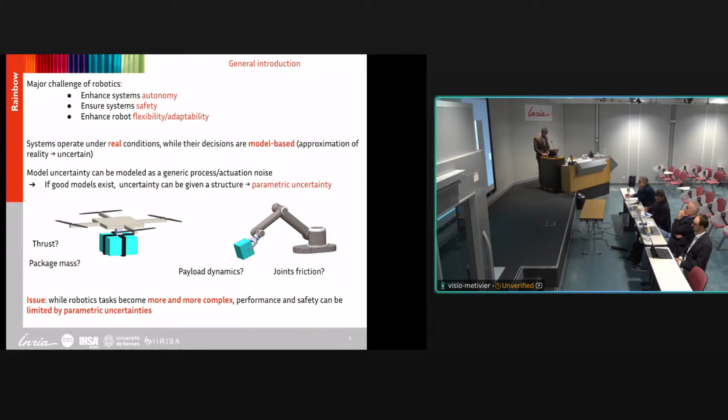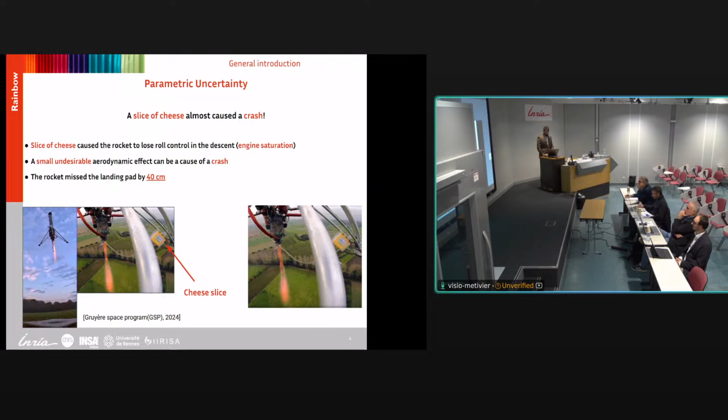A cool example about parametric uncertainty: did you know that a slice of cheese almost caused a crash? This happened with the GSP company in Switzerland in 2024, just recently. They attached a slice of cheese to the base of the rocket during descent, and this rocket lost roll control, which caused engine saturation. So a small undesirable aerodynamic effect can cause a crash — the rocket ended up missing its landing pad by about 40 centimeters. In robotics and aerospace, even minor factors can have amplified effects due to the system dynamics.

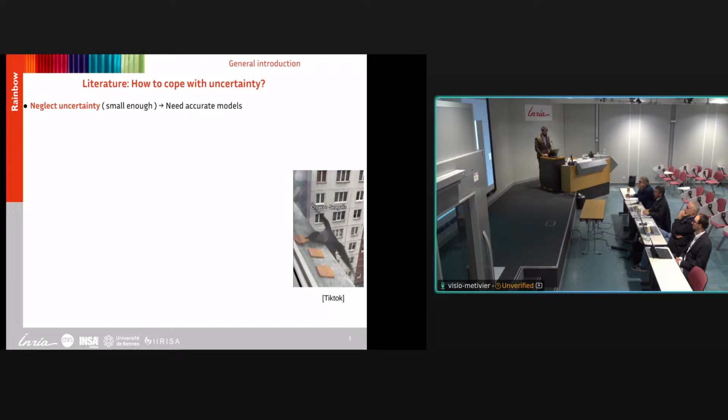So in the literature, how do we cope with uncertainty? You usually neglect uncertainty, considering it small enough, but this would necessitate having accurate models. You could add integral terms or adaptation rules, but this would slow the system responses and degrade the transient state. Or you use robust controllers to reject disturbance or noise, but this is a trade-off for performance, because robust controllers are usually designed for worst-case scenarios, which is not the best choice if your system is operating at nominal parameters.

So our solution is robust control-aware motion planning. It's about picking your favorite controller and then optimizing the reference trajectory such that the task execution is most insensitive to these parametric uncertainties. This is a generalized method for any choice of system controller.

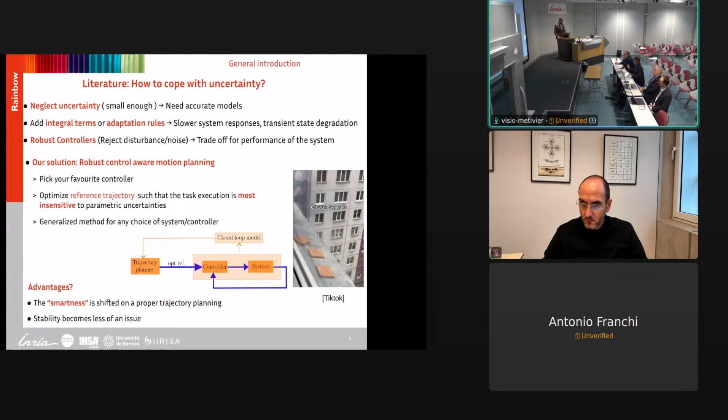The advantage you get is that the smartness is actually shifted onto proper trajectory planning rather than designing sophisticated control laws, and stability becomes less of an issue because you're able to choose the controller that you're comfortable with or that's statistically proven for your system.

Take an example: these two birds both have the same structure, they both can fly very well, but one had a robust methodology in reaching the biscuit and the other didn't. These examples can be found really in nature everywhere.

So about now, we will delve into a small literature review about robustness. When we speak about robustness, the primary goal is to meet some system requirements, like stability, safety, precision, and performance of the system when it's perturbed from its nominal behavior.

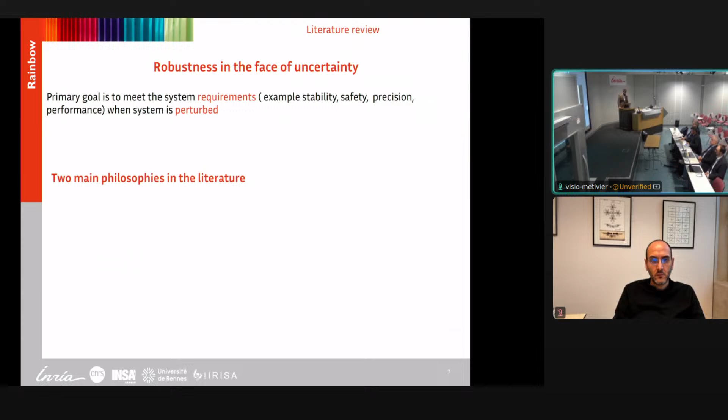There are two main philosophies in the literature to tackle this problem: either you go for robust control methods that improve robustness by controller design, or you select a robust trajectory where robustness is achieved by proper trajectory planning. Because the majority of our thesis will speak just about robust trajectory, in this literature review I will be speaking about just robust control methods.

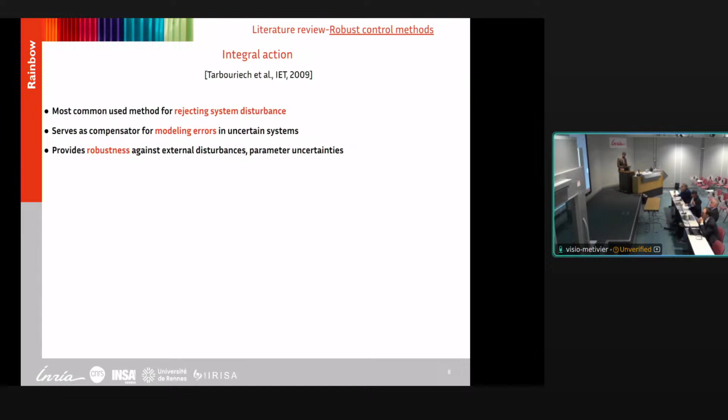Integral action is one of the most common methods used for rejecting system disturbances. It serves as a compensator for modeling errors in uncertain systems, and also provides robustness against external disturbances and parametric uncertainties. But it comes with a limitation: it can have poor response to disturbances with rapid dynamics, and it can cause instability if not tuned correctly, which would lead to actuator saturation, backlash, and rate constraints.

To mitigate this effect, anti-windup techniques exist in the literature, consisting of halting the integration process or offloading the integrator. But this technique is somehow conservative—you have to set it in a conservative approach before reaching the actuation limit, because the actuators are subject to uncertainties.

Another common method is incremental nonlinear dynamic inversion, or INDI. It's a sensor-based technique designed to handle severe disturbances. It was first used for quadrotor UAVs under wind gust loads, which made it gain its reputation, especially after the improvement from 0.5 meter tracking deviation with classical PID to only 5 centimeter deviation with INDI at wind speeds reaching up to 4 meters per second.

Just an intuition about the control loop: it's designed so the control command depends on the previous control command, plus an inversion of a control effectiveness matrix, and servoing on the acceleration level.

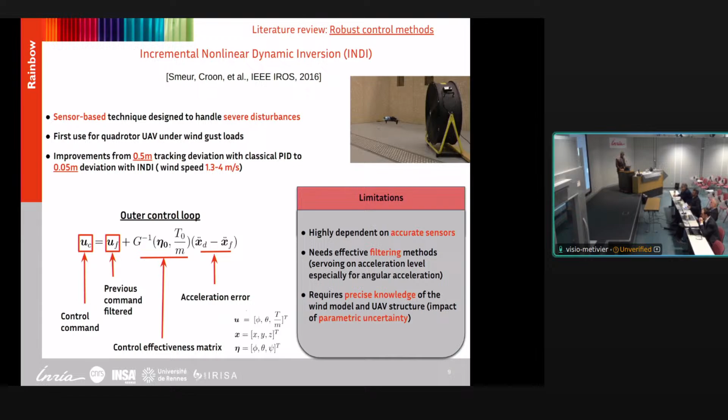The limitations are actually quite obvious. It's highly dependent on accurate sensors and also needs effective filtering methods, because you're servoing on the acceleration level, especially for angular acceleration, which is not readily available—you have to differentiate to get this, and a lot of filtering is involved. It also requires precise knowledge of the wind model and the UAV structure, which are both prone to parametric uncertainties.

Another cool approach was introduced by Fliess in 2009—it's a model-free controller. It addresses the challenges posed by uncertain systems. MFC depends on an ultra-local model that is updated frequently to estimate the external or internal disturbances that affect the system, and basically it depends on the knowledge of the input-output behavior.

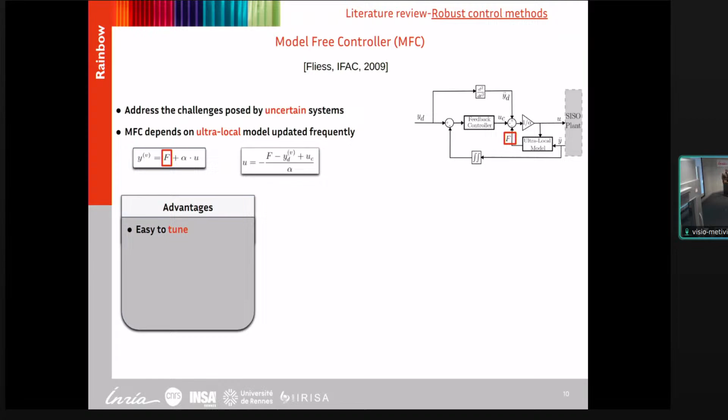It's not explicitly defined. The advantage is that it's easy to tune, can be augmented with any feedback controller since MFC is not a standalone controller by itself, and it's model-free.

At ENAC, they used these kinds of controllers for transitions between flight modes, because it's very difficult to have accurate models for that, as a lot of parameters are included in the uncertainty during transition. It's very difficult to explicitly model these aerodynamic effects, and it proved good accuracy.

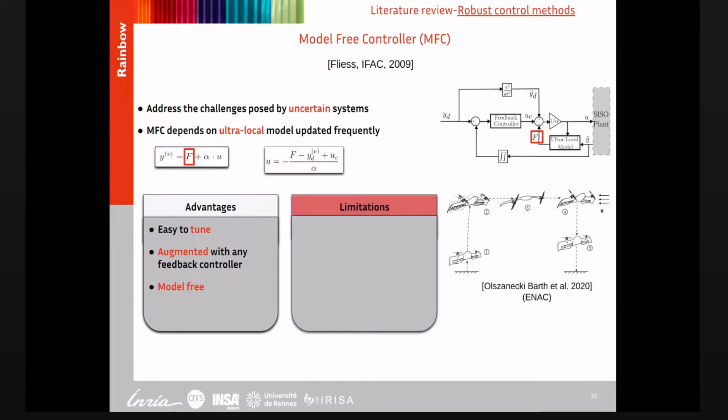The limitation is that the ultra-local model actually requires updates at fast rates and needs filtering for the noisy system output. Model predictive control has shown promising results for quadrotor control, but because MPC makes its decisions based on the model of the system, it can have degraded performance if high fidelity models are not considered.

The solution, as in the paper referenced above, is to augment MPC with an adaptive controller to learn uncertainties online. The advantage of using model predictive control is that you always have an optimal solution, and it works well with handling system constraints. However, the limitation is that it's highly dependent on the model of the system and disturbance, and it demands significant computational and memory resources, which makes it really difficult to apply for standard drones.

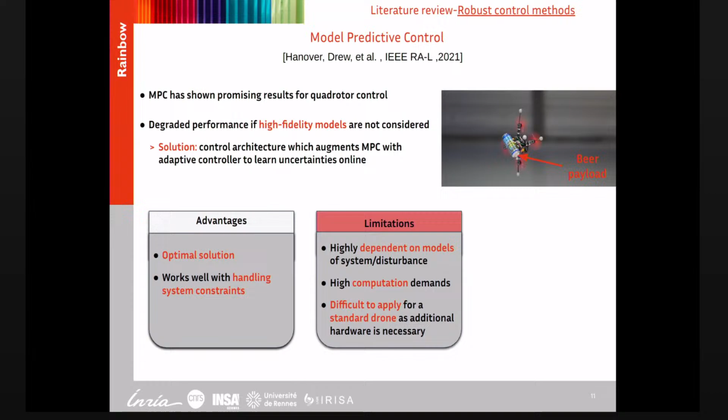So now for the main theoretical part of our thesis, trajectory optimization through sensitivity analysis. We start with the problem definition.

Consider the system defined by ordinary differential equations, x dot, a function of the states of the system, the input, and possibly uncertain model parameters p. The control goal is actually to track a desired trajectory sd, which is a function of control points and time. And then you pick your favorite controller that is able to solve this tracking task.

This controller would be a function of the states, the parameters around the parameters at the nominal value, and it can have internal states, xi dot, which can be of integral action. So here we have to differentiate between two cases, actually.

If p is equal to pc, meaning that the parameters inside the model do not deviate much from the nominal, so they are equal to the nominal parameters, the control task can be realized very well. However, if this is not the case, you have parametric uncertainty and possibly degraded tracking.

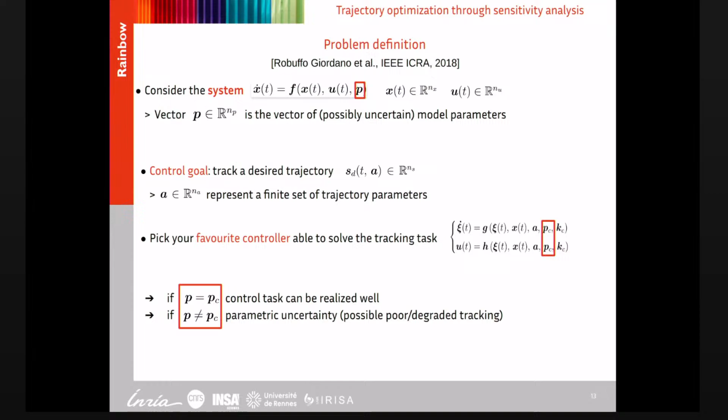A possible metric to capture the idea of the sensitivity with respect to the parameter variations are both the state sensitivity matrix and the input sensitivity matrix, which show how variations of the parameters around a nominal value would affect both the state and the input respectively.

Matrix pi, however, does not admit a closed form expression. The dynamics can be made explicit as follows, and we actually calculate pi dot, we integrate it to get pi. With the controller state sensitivity being how variations in the parameters can affect the internal states of the controller.

And now matrices pi and theta can be used in the context of trajectory optimization. The reference trajectory can be optimized with the following objectives, as done previously in the lab: minimization of the state sensitivity at the final time to reach its desired location, while changing, of course, the decision variables would be the shape of the trajectory.

Minimize the state sensitivity over the whole trajectory so that you increase the tracking. Or minimize the state sensitivity at a certain time while minimizing the input sensitivity along the trajectory so that you have the inputs not varying that much from the nominal case.

However, there is a more intelligent way to address this problem, and it is with the tubes. So we can actually compute the tubes representing the envelope of the perturbed evolution of the states and input, and we can actually deduce a new norm to be placed instead of the old norms, which depends, by the way, on the Frobenius norm.

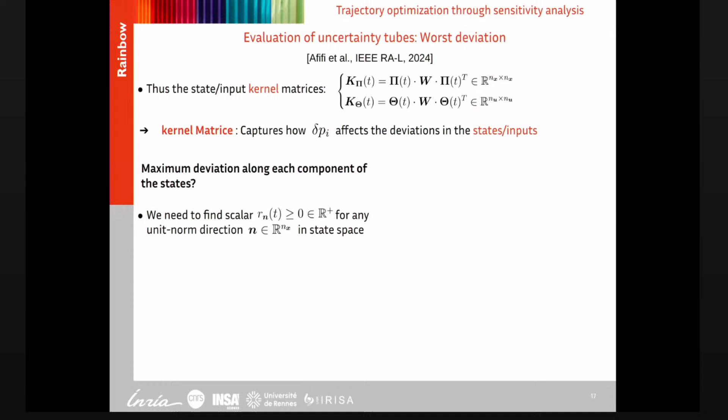And now these kernel matrices K pi and K theta would capture how delta p actually affects the deviations in states and inputs. However, if you are interested in finding the maximum deviation along each component of the states, and also the input is an analogous problem, you can find this scalar, let's say, or radius of the tube for any direction in the state space.

And this would allow you to calculate actually the perturbed tubes, which is a set of ellipsoids along each component of the states centered around the nominal value. And the radius can be deduced from the reference above, depending on the kernel matrix. And also the input is analogous and would depend on the kernel matrix of the input.

So for the novel optimization problem, each optimization problem would consist of the decision variables, the objective function, and the constraints. So for the objective, we take a new sensitivity norm, which is weighted by W, which is the maximum eigenvalue that I can suffer along the states, the maximum eigenvalue of the kernel matrix K pi. And the decision variables in our case are the parameters that shape the trajectory.

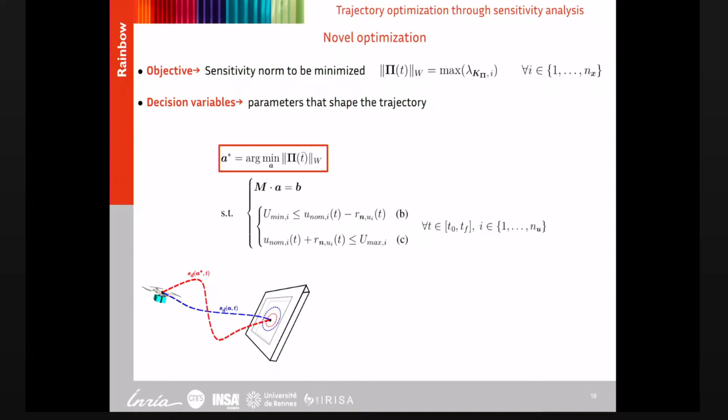Take an example: we want to obtain the red trajectory such that we have as an objective a minimized, let's say, uncertainty ellipsoid while navigating through a window.

The constraints include the usual boundary conditions on the control points, and also the perturbed inputs as bounds. We don't limit the nominal case of the input to avoid hitting the limits, but we limit the maximum deviation the input can suffer. That's why we call them robust constraints, which we'll discuss later in the contribution section.

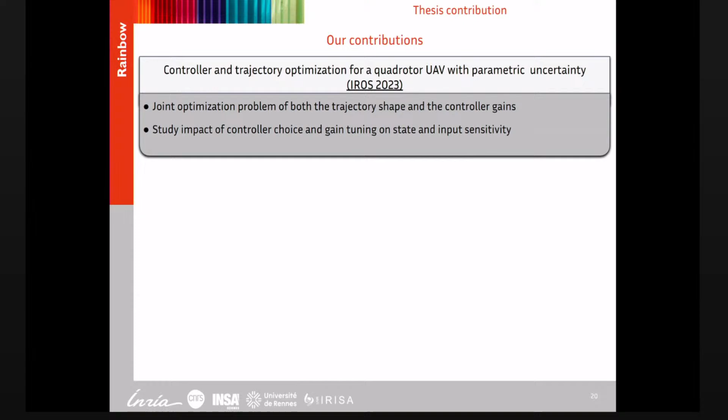For the contributions, the first was at IROS 2023, where we explored this joint optimization problem for both the trajectory shape and the control gains. We also wanted to study the impact of controller choice and gain tuning on the state and input sensitivity. At ICUAS 2024, we validated this approach on a standard drone equipped with a commonly used controller.

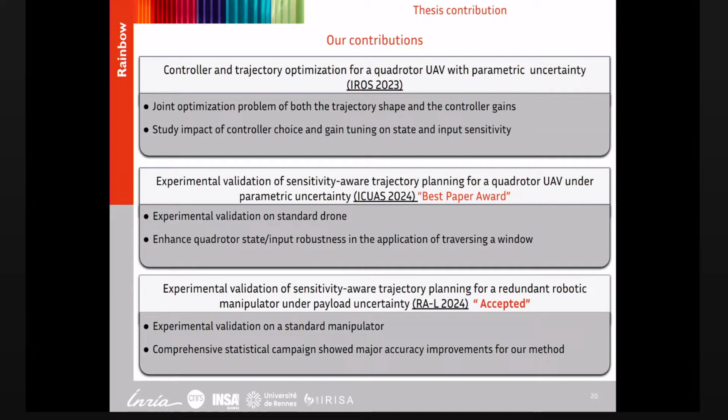Our interest in that project was to enhance the quadrotor state and input robustness in applications of traversing a window. Finally, since all the sensitivity work had been done on drones so far, we extended this to include another robot, the manipulator, applying this theory to package handling inside a factory. We showed, with a comprehensive statistical campaign, major accuracy improvements for our method.

So we start with the first contribution. The motivation was that previous works relied on a single control strategy, dynamic feedback linearization, with no exploration of different controllers. We wanted to explore a joint optimization that can optimize both the controller gains and the reference trajectory.

For this, we suppose the normal states—position, velocity, orientation, and angular velocity—be the states of the system. We define the quadrotor model as in the reference by Antonelli, and the allocation map, which maps the forces and torques of the controller to individual motor speeds. Motor speeds can be deduced by inverting this matrix.

The difficult-to-measure parameters in this contribution are Kf and K-tau, the coefficients of thrust and torque of the propellers, and Gx and Gy, which are the shift in the center of mass of the drone.

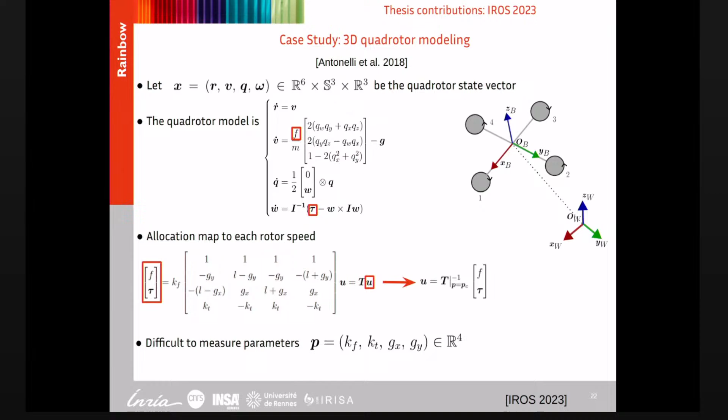In this contribution, we consider three controllers: the near-hovering controller, the most commonly used strategy, based on linearized PID controllers; the geometric controller, a popular strategy for dealing with maneuvers; and the sliding mode controller, a robust controller that handles model uncertainties well.

For each controller, we consider three optimization problems. The first optimizes the shape of the trajectory. The second, OPTK, optimizes only the gains. The third optimizes both the shape and the gains. This is done to minimize the maximum deviation the states can suffer at the final time.

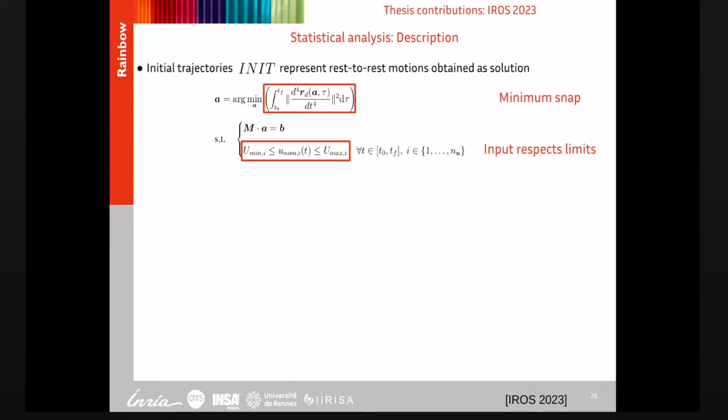The initial trajectories we use are optimized for minimum snap along the trajectory, giving a smoother trajectory as an initial guess that respects the actuation limits.

We are interested in improving the accuracy of the position at the final time. The total number of trajectories taken for the statistical campaign is 25 for each trajectory case—basically 4 cases, so 100 for each controller across all cases.

For each of these trajectories, we run 30 simulations with perturbations. Other parameters lie inside the ellipsoid with 15% deviation on Kf and K-tau, and 15% deviation of the total arm length L for Gx and Gy.

Here we display only one trajectory for all cases and controllers. The cases are on the rows and the controllers on each column. We show the 30 perturbed simulations and report the final positions of each, from which you can deduce the uncertainty ellipsoid at the final time.

Across all the cases and rows, it's clear that the joint optimization had the best performance, producing the minimal size of the uncertainty ellipsoid.

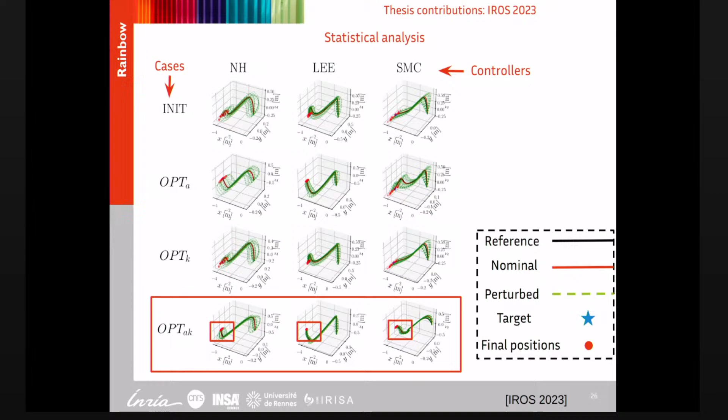We also wanted to explore how much each parameter affects the deviations of the states X, Y, and Z. We deduced that Kf mostly affected the Z state deviations, while Gx and Gy affected both X and Y. However, K-tau had a negligible effect compared to the other parameters.

And now we display the full statistical study based on 25 trajectories for each of the cases with the simulation run 30 times in the perturbed runs.

It's clear that the joint optimization in red was the best. First, we tuned all the controllers such that in the init case, they have a comparable median, about 8 centimeters. Then we went through applying these 3 optimization problems. It's worth noting that in the joint optimization, we had the best performance, where it decreased from 8 centimeters to 2 centimeters only as a median, irrespective of the controller choice.

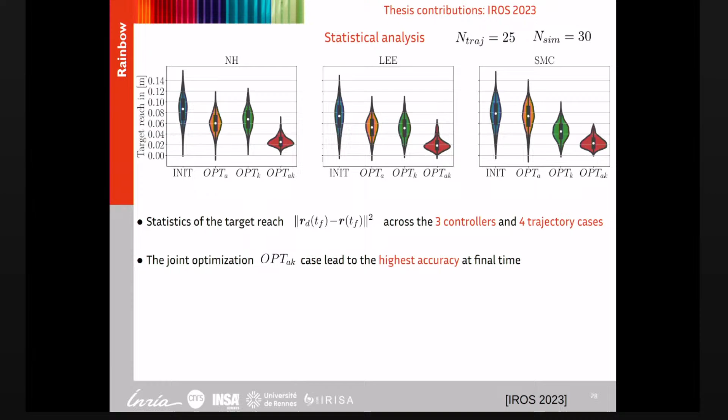For the sliding mode controller, for example, in orange, the optimization of the shape didn't change much the median. However, the optimization of the gains changed it twice, so it decreased 50%. So basically, we can conclude that changing the shape is not a relevant factor for the sliding mode controller, but changing the gains is more relevant.

And for the near hovering and the Lee controller, both were affected by both optimizations, the shape and the gains. So both of these are relevant factors for these controllers. In summary, the joint optimization is effective in mitigating the effects of parameter variations, and we managed to study the most influential parameters that affect the states.

However, the main limitation is the lack of experimental data so far. We didn't experiment with a real quadrotor UAV. And the importance of the input sensitivity inside the constraint was not studied in this contribution.

Also, the bottleneck of this contribution is the computational times, where you have 2 to 4 minutes per trajectory, not in real time. However, it's worth noting that before starting this PhD, the computational times were about 25 to 30 minutes, so it decreased significantly. But the main priority of this PhD was not computational times, it was more about the theory, the implementation, and the validation.

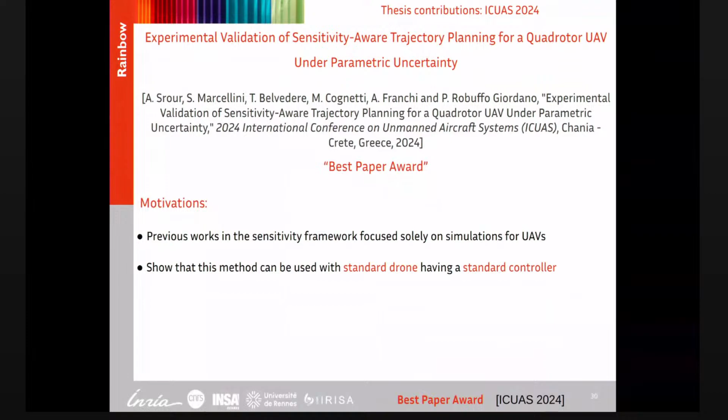So for the second trajectory, for the second contribution, our motivation was that previous works in the sensitivity framework focused solely on simulations of the UAVs and never made it to the experiments. So we wanted to show that this method can be used with a standard drone that you have in the lab with a standard controller commonly used, and we wanted to show the importance of robustifying the inputs by the tubes.

In this contribution, we consider a different model for the quadrotor, which takes into consideration the shift in the center of mass.

We define the forces and the torques acting on the quadrotor, and then we define this inertia matrix. The inversion of this inertia matrix multiplied by the force and the torques would give you the linear and angular accelerations in the body frame. Then you can write the quadrotor model of the displaced center of mass.

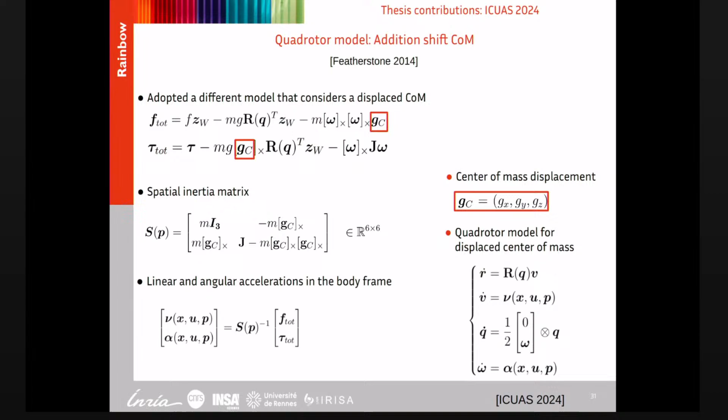And we used in this contribution the PX4 controller, which is widely adopted in the community. We did a reverse engineering so as to add it to our sensitivity framework from the GitHub pages. It has this kind of cascaded structure, consisting of PID controllers, with 4 stages.

Here, the allocation map is different because we don't consider the shift in the center of mass anymore in the allocation map. We consider it in the model instead.

The uncertain parameters we consider in this contribution were Kf, the shift in the center of mass, and the mass. And the aim was to optimize the shape of the trajectory so as to minimize the maximum deviation that we can suffer on the states at a specific time of interest, TW.

In the older contribution, we had this at the final time, but now we are interested in another point, which is at TW.

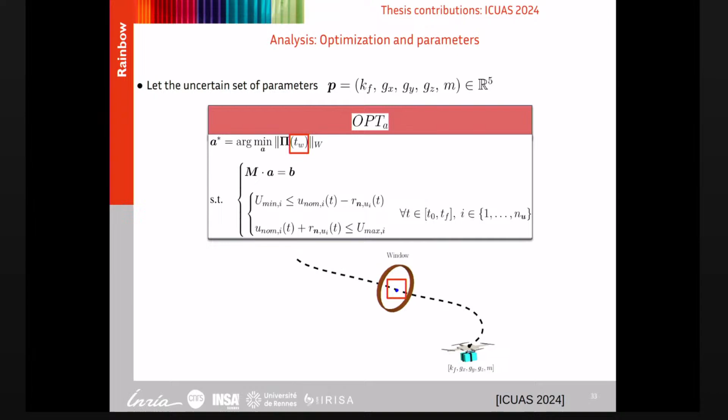We applied, in this contribution, the methods on 2 distinct trajectories, with trajectory 1 of 7 seconds and trajectory 2 of 5 seconds, with the cases, each one having a case init and OPT_a. The initial trajectories are obtained by the snap pre-optimization, as before, and the drone has to pass through the window at about 2 to 2.5 meters per second.

The main goal is to evaluate the precision of traversing the center of the window at t_w.

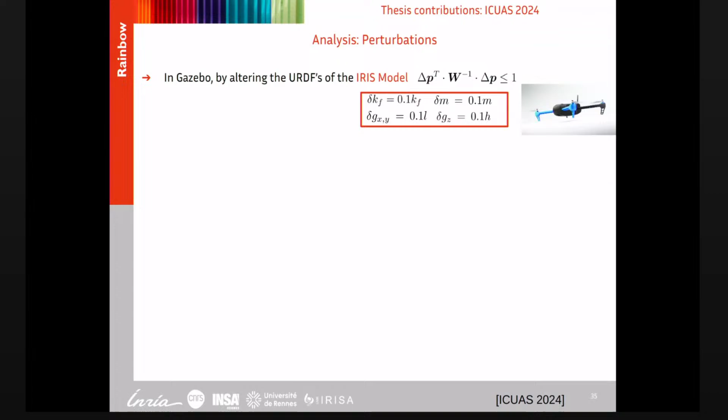The perturbations were done by altering the URDF description of the iris model, following the uncertainty ellipsoid in the parameter space. In the real experiment, it was done in a different way, but it was done by extending the drone by a shaft and then placing some tools on the drone so as to modify these parameters. In total, we have a nominal case, 1 nominal case, and 11 perturbed cases, both in simulation and experiment.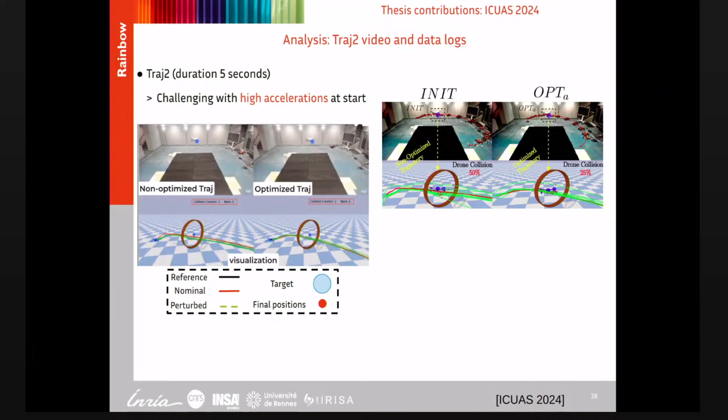After all of this experiment, you can compare the uncertainty ellipsoid on the state. It's obvious the minimization — the uncertainty ellipsoid is actually minimized, and it had a lower risk of collision. In the init case, we had about 50% collision, and it decreased to about 25%.

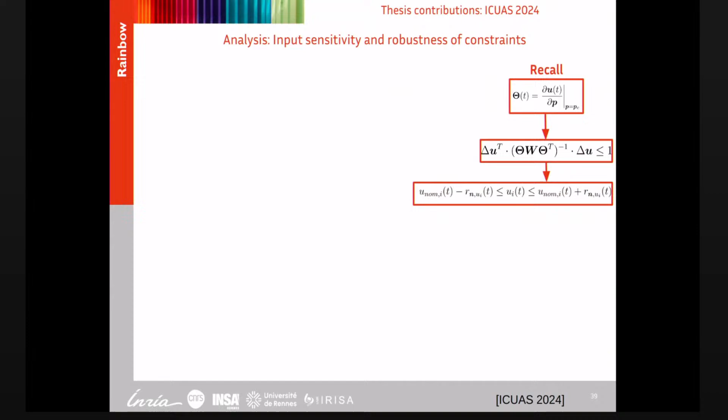We spoke about input sensitivity, but we didn't see it in real terms. Now we will speak about how we can robustify any function of interest. Recall that input sensitivity is how variations of the parameters affect the input. We were able to project, from the first order approximation, the uncertainty ellipsoid of the input space, and then find the maximum deviation along each of the input components, including these tubes inside the constraints of the optimization problem.

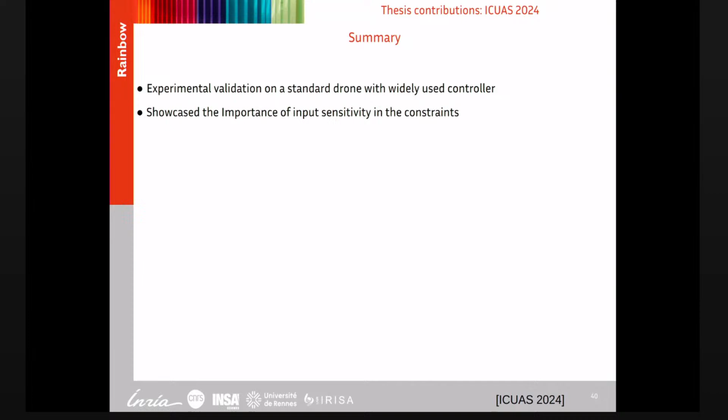In summary, we did an experimental validation on a drone with a widely used controller, and we showcased the importance of input sensitivity inside the constraints. The main limitation is that the trajectory optimization is still not in real time — it takes on average 6 minutes for a 7-second trajectory with 4 to 6 waypoints.

So far we focused on UAVs only, but these concepts are actually general, so we need to apply them to other robots. This motivated our final contribution, recently accepted at RAL. The motivation is that previous works focused on UAVs, while the sensitivity framework is suitable for any system. We want to show the importance of our method in increasing accuracy and repeatability within repetitive tasks, such as package handling, and to show that this method can be used with a standard manipulator having a standard controller without any additional hardware necessary.

So for this, we consider a robotic model in the joint space with Q, Q dot, Q double dot being the joint angles, velocities, and accelerations. The robot has to manipulate a payload, which can be seen as an additional link of the robot at the end effector. And the parameters of the end effector can be adjusted as so.

We consider the uncertain load parameters to be the mass, the center of mass of the payload, and also the inertia, which is a subset of the big inertia matrix, because the inertia matrix is symmetric. So we take fewer parameters.

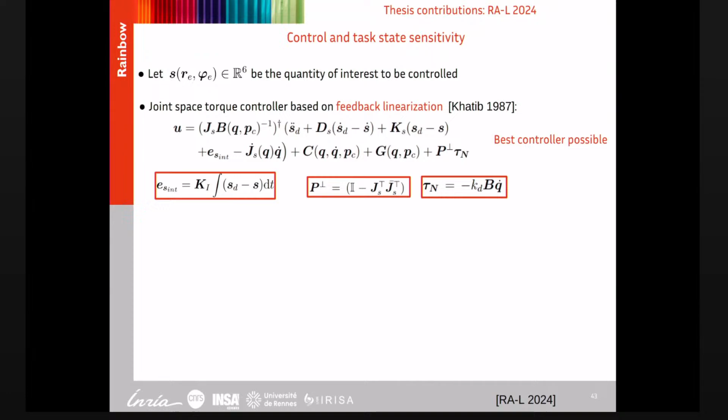For the control task, we let S be the position and orientation of the robot, the quantity of interest to be controlled. We applied this joint space torque controller based on feedback linearization, and we seek the best controller possible for these kinds of tasks.

Our focus was actually the sensitivity, to increase the accuracy of position and linear velocity, denoted by capital X. For this, we calculate the task state sensitivity, which would be a Jacobian multiplied by the state sensitivity matrix.

Then one can deduce the ellipsoid in the end effector state space, and the kernel matrix can be deduced. Then we consider a new norm, the sensitivity norm, which is the maximum value of the maximum eigenvalue of the new kernel matrix.

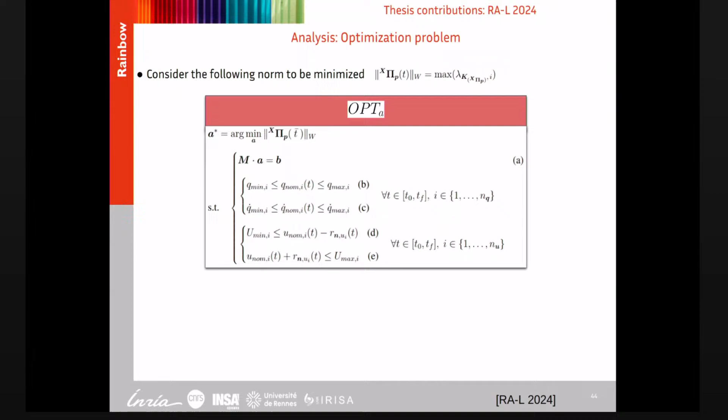The optimization here is to optimize the shape of the trajectory, respecting the same constraints as before, but here we also add constraints on the joint angles and joint velocities. Two scenarios would be considered.

The first scenario, A, is sensitivity minimization at the final time. We seek higher accuracy at the final time, and this is with trajectory 1. Scenario B is sensitivity minimization at a specific time of interest, T equal to TW.

We seek increasing the end effector state accuracy while in motion, and this is with trajectory 3. Trajectory 2 was omitted just for the sake of time.

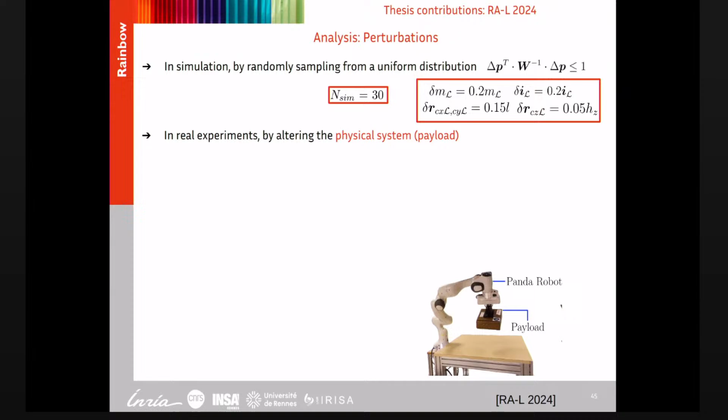The perturbations were done in simulation by randomly sampling from the uniform distribution of the ellipsoid. We took 30 perturbed simulation runs, and in a real experiment, by altering the physical payload.

We have the nominal case and then 14 perturbed cases, for a total of 15 experiments. The physical modifications included payload mass between 1.6 to 2.4 kilograms, with inertia variation up to 20%, and deviation in the center of mass up to plus or minus 3 centimeters on X and Y, and 0.35 centimeters on Z. This would affect all the parameters considered.

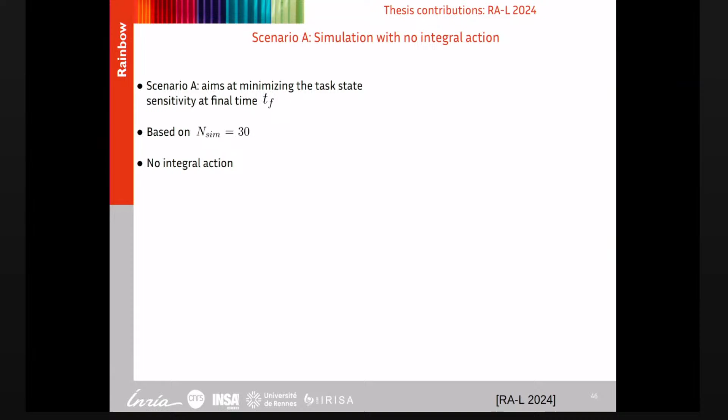In simulation, without an integral term inside the controller, based on scenario A, we aim only at minimizing sensitivity at the final time. For trajectory 1, the average target reach was about 1.2 centimeters, and it decreased to 8 millimeters for the optimized case, with much less variance.

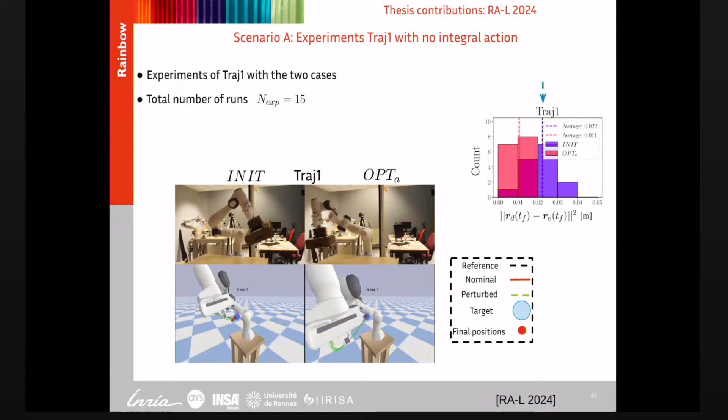We got an improvement from 2.2 centimeters in the target reach to 1.1 centimeters, with much less variance for our method. Comparing the uncertainty ellipsoid, it's evident that we reduced it by about 50%.

Now with integral action for trajectory 1, we add this to see how the integral would increase the robustness of the methods. We consider two additional cases, init I and opt AI, with the integral action, for trajectory 1, with the same scenario A.

We consider two additional scenarios: that the robot stops at the final time TF, or that we have allocated an additional time budget of 5 seconds for the integrator to compensate for the error.

In init I, we improved from 2.2 centimeters to 1.7 centimeters in the average target reach in scenario A, and further to 1.5 centimeters in scenario B. However, for the optimized case, the improvement was from 1.1 centimeters to 7 millimeters of the average reach, and further improved to 6 millimeters.

It's worth noting that the optimized case, without an integral term and without post delay, still outperforms init I with integral and with post delay. We did a simulation campaign of 10 distinct trajectories for these cases, init I and opt AI, which validates this experimental data.

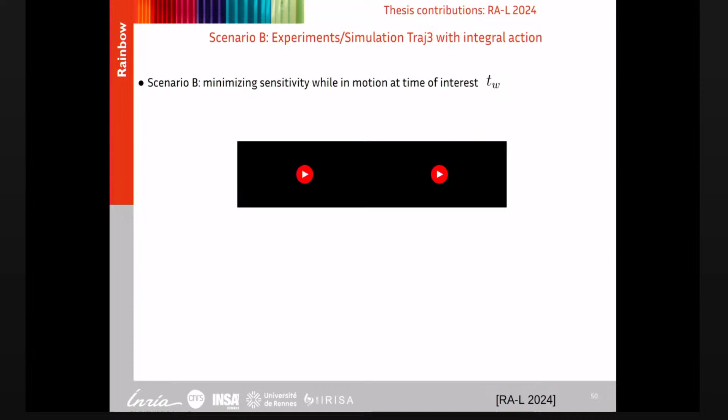For scenario B, we are interested in minimizing, while in motion, the sensitivity at a point of interest. We display for the sake of time only the nominal case, init on the left and OPT on the right. In simulation, based on 30 runs, we got improvement of 28% in position and 29% in velocity, while in experiment we improved 17% on position and 46% on velocity based on 15 experiments.

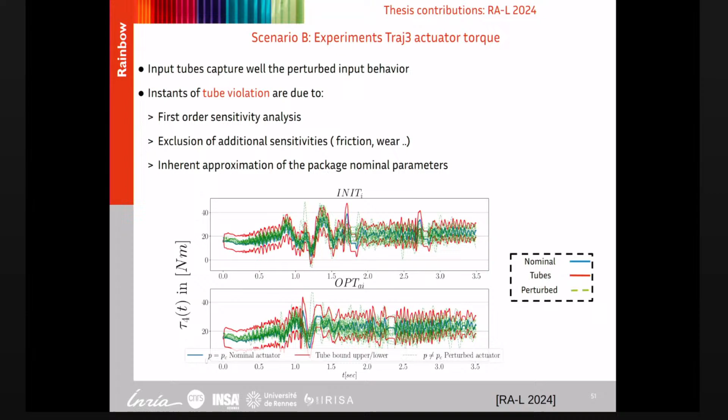In summary, we did an experimental validation on a manipulator for the task of package handling. The simulations and experimental data showed effectiveness of our method, reaching up to 50% improvement, and we have good performance without needing to add integral terms and post delays.

The main limitation is that trajectory optimization is far from real time. It takes up to 60 minutes for a 2-second trajectory with 4 to 6 waypoints. There were also instances where the perturbed behavior of the system violated the predicted tubes, especially for the inputs.

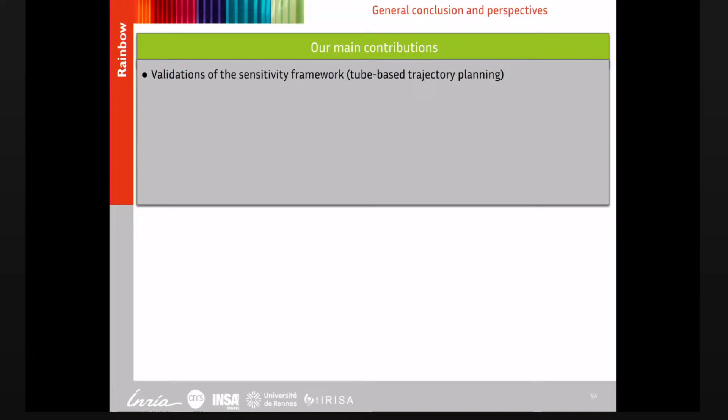In conclusion, our main contribution was the validation of the sensitivity framework, tube-based trajectory planning with sensitivity analysis. At IROS 2023, we explored joint optimization of both the trajectory and the controller gains. At ICUAS 2024, we empirically validated the sensitivity framework for a standard drone with the commonly used PX4 controller, with real physical perturbation for the task of navigating through a window.

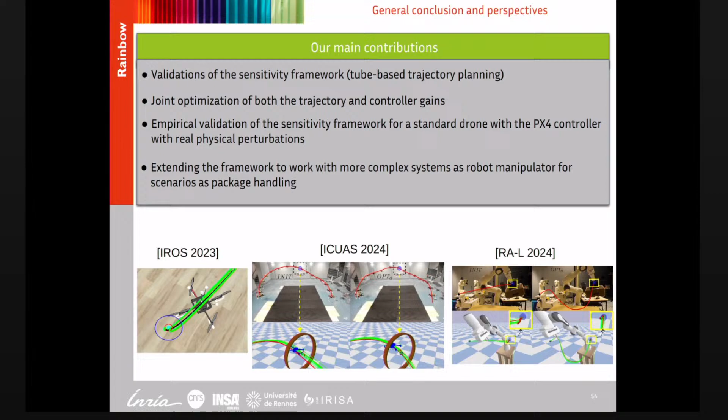We extended this framework to include an additional, much more complex robot in scenarios of package handling, and we managed to improve the accuracy by about 50%.

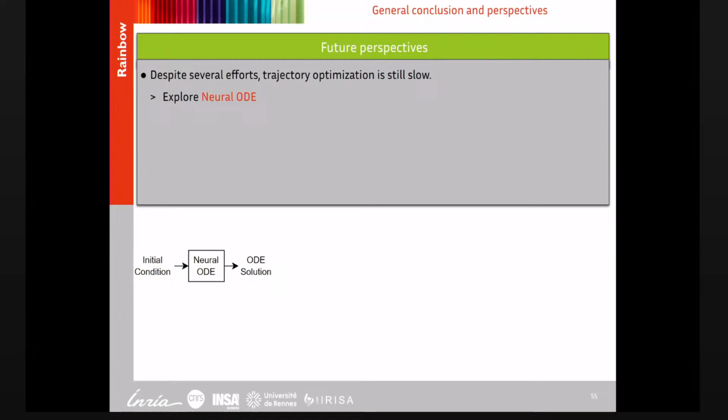In future perspective, despite several efforts, trajectory optimization is still very slow. So we advise exploring neural ordinary differential equations, which depend on a neural network to estimate and solve the ODE, and maybe you can get better timing with these kinds of approaches.

We also advise exploring software packages like Acados, which provides fast and embedded solvers better than the ones we are using.

Also, one can robustify any function of the states or inputs and optimize for power or time. This is really useful for time-optimal trajectories, where you can just put constraints on the states and inputs and optimize for any other objective.

One can also add additional external forces or friction. Wind is possible, the torques caused by wind depend on some nominal knowledge of parameters like mass, especially for example in dynamic positioning applications for ships, which depend on the mass of the ship, its structure, and some nominal parameters. With a feedback controller, you can take nominal knowledge of these parameters and apply the sensitivity framework. So I want to thank you all for listening.

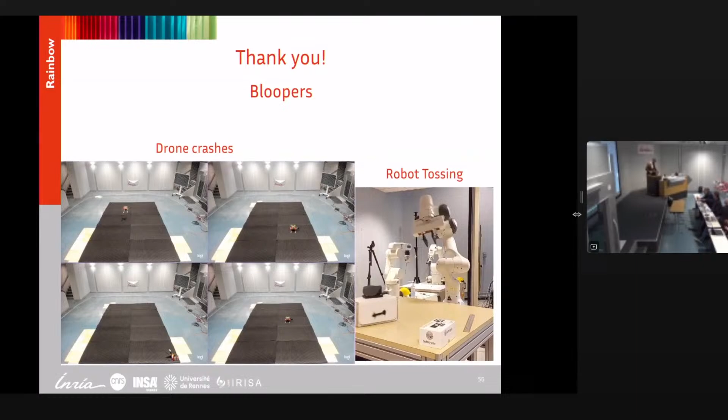Okay, thank you. First of all, I would like to thank Paolo for inviting me here today. It's always a pleasure to be here. Thank you again. And also, I would like to thank you, Ali, for your PhD manuscript. I really enjoyed reading it, it was really nice, very nice figures, very nice experiments. Congratulations for that. I have a few questions that I already put in my report, but I will ask you also today, so I will follow the presentation.

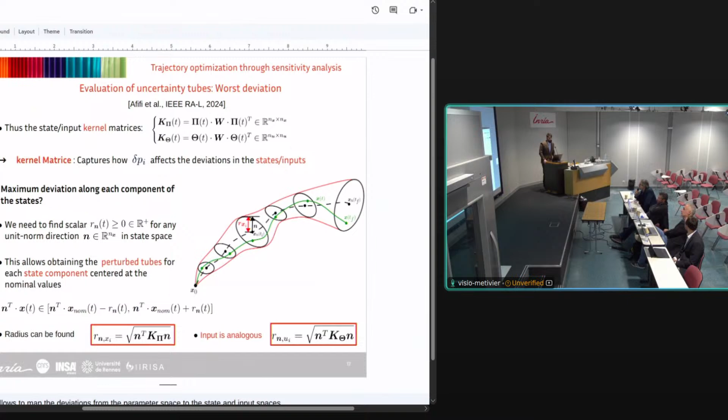So if you go to slide 16. Now, just a question about the kernel matrix that you have here, which you define at the bottom of the slide. I think in the next slide you call it K pi, K theta. And so you need to compute the inverse of this matrix, do you have the guarantee that this matrix is always invertible, or actually not? We never wanted to calculate the inverse, because if you look at the radius of the tube, it's just the radical of K pi, so we didn't need to compute any inverse of this matrix. So you have this just in the definition of the ellipsoid, but you do not actually have to compute the inverse. No, not at all.

Okay, so slide 18. Yes.

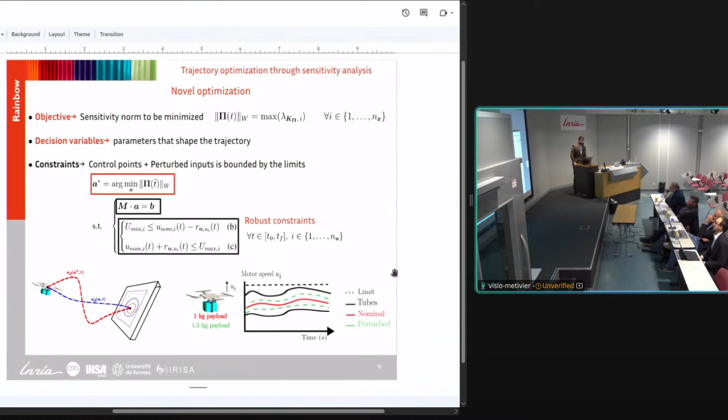So you consider this a new cost function, but I think this cost function was also considered by the previous PhD student, the lambda max. So what is really new with respect to the previous thesis?

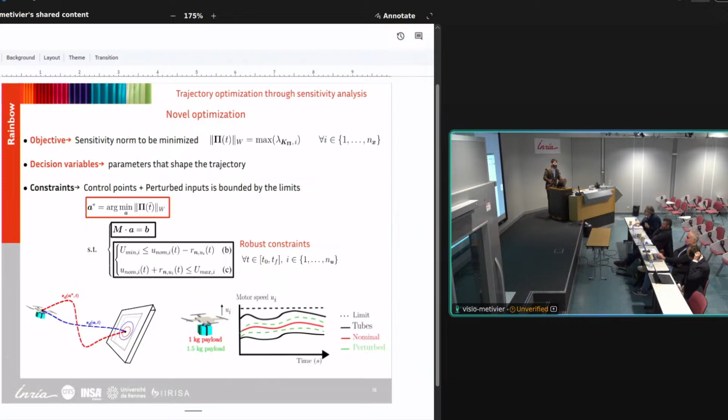Thank you for the question. Actually, I started my PhD at the time when Pascal was in the middle of his PhD, so we were somehow working on the same theory, more or less. At that time we were validating this approach, so maybe you would find it in Pascal's defense, but I was also involved and working on this stuff.

It was new for me, and at Pascal's time, okay. Another question: you didn't mention it in the presentation, but it's in the manuscript. To write this optimization problem, you pass through a discretization, so you use Bézier curves to do this. Why this choice? Could you have used other approximations? This has been done previously, but why this choice?

We didn't really focus on the trajectory representation that much, because at the end of the day you are converting from the infinite dimensional space to a specific representation. So we didn't really explore whether another kind of parameterization would have a better effect. To be honest, working with Bézier curves is somehow intuitive, and it was not the main contribution of this thesis. It was with Pascal, so I kind of continued because I didn't face any problems with it. Some modifications happened along the way, just about how the functions are written, but more or less I kept the representation as it is.

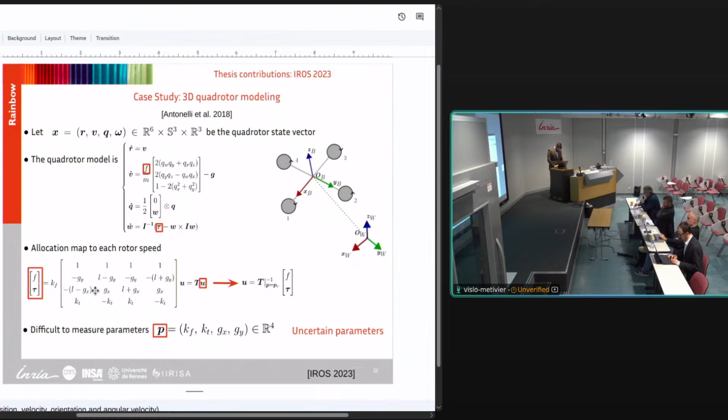So, a general question. You mentioned in the conclusion of each part of your presentation that the computational cost is still a bit too long. We are not in real time. You mentioned that with respect to previous work, before it was 30-40 minutes, now it's about a few minutes. So first, what did you improve? And second, is it possible to finally go to real time? What should be done to achieve this?

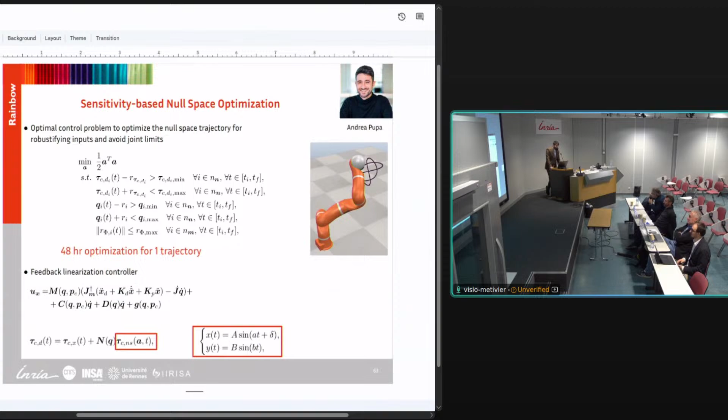Then I have another small question, about the experiment you did with the quadrotors. In the thesis, you wrote that the goal was to pass through a window, and I was thinking of a rectangular standard window. So why did you consider a circular one? Is there a real reason for that? Because I read this paper — this one here — from the guys with circular gates, University of Zurich. But it's not that I like round shapes or something.

This simplifies somehow your formulation, or is there no special reason? Not really, because we didn't actually consider any tubes on the states of the system. We could have considered tubes on the states and minimized another objective function, but we didn't do that. Maybe if you consider tubes on the states, it's better to have a circle than a rectangle, but we didn't do that.

I also have a question on the experiment with the quadrotors. You considered different configurations, different objects, etc. So the question is: how did you measure the nominal parameters in this case?

So basically, PC would be the center of mass, the KF, K tau, and so on. KF and K tau are easy—you just find them online, from any research paper with the same propeller. It wasn't complicated. You speak about PC, right?

About the nominal parameters, you considered 11 different cases. The mass, the center of mass, I think is changing. How do you measure the actual center of mass versus the nominal center of mass?

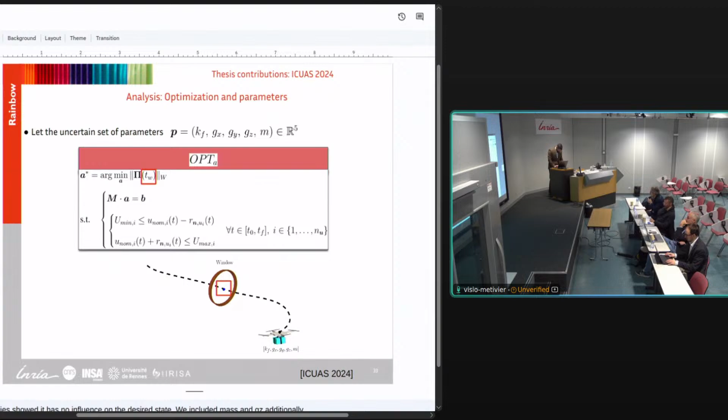This was more about the manipulator part. When I read this, I thought about robots used in warehouses—kind of like an Amazon robot manipulating packages. In that kind of application, you don't know anything about the boxes: not the mass, not the inertia. So what can you do? Is your method still usable? What kind of assumptions should we make?

I think if you just know the maximum deviation, like in the W matrix, you can know the maximum deviation you can suffer. You can really apply it because we don't need to know the exact parameter or where it's located in the ellipsoid—it can be anywhere. So even with something like a bottle of water that's half empty, where the inertia is varying, if it's within the ranges, then yes, it's applicable.

Okay, and also in this part, it was slide 47—I think that was the slide before, where we see the trajectory. So you mentioned that in terms of precision, you have a gain of 2 centimeters accuracy for this trajectory.

For the experiment, yes, but in the simulation it was 12 to 8 millimeters. Okay, but the disadvantage, as far as I understood, is the trajectory could be quite longer. So you have something better in terms of precision and accuracy, but you have a much longer trajectory. So where is the trade-off, let's say?

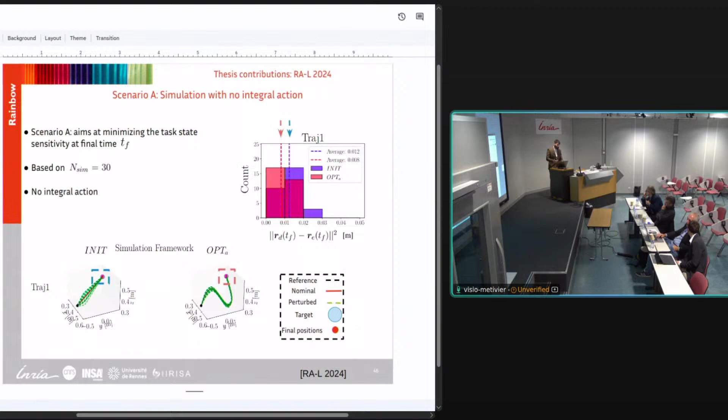But I would say, if you're concerned about power consumption, the actuation seems really the same—we're using the same actuation, maybe higher speeds because it's longer and you need to reach the target in the same time. Maybe higher speed, but overall the actuation didn't differ that much. So in terms of actuation or power, we didn't lose much, but we gained in accuracy.

So I would say the only limitation is that you have to wait 60 minutes. But for this kind of repetitive task, you just calculate it one time—once—so why would you need to calculate it every time?

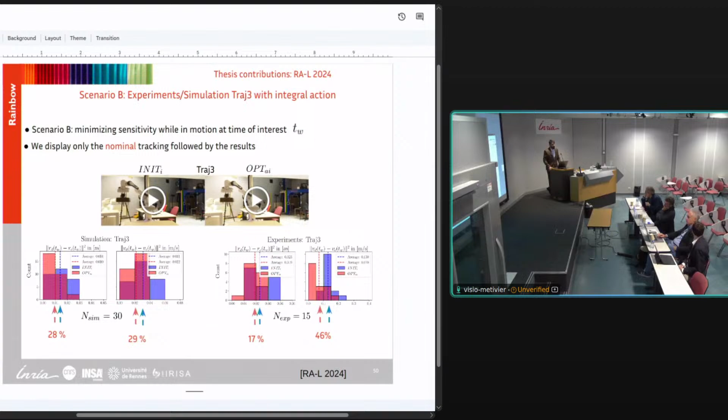Okay, I have two more questions. One is about this part with the manipulator—you considered the same cost function as for the quadrotor, the minimization of the snap.

And so for the quadrotor, in the quadrotor literature, this is quite common. There are a lot of works that consider this kind of cost, but is it really a good cost function for a manipulator? Is it really pertinent in that case?

Yeah, you're right. So we wanted to actually just compare with any trajectory. We didn't really care about this trajectory being designed in some way. Maybe some applications would need this trajectory to be designed in terms of power. We can minimize power, we can minimize velocity, something like that. But why not minimize the snap? So it's why not.

I would say the main concern that we had is that we want a trajectory to respect the limits and to be as smooth as possible. Whether it was the minimum snap or whether we use another objective, I don't find that critical. Is that a reasonable choice?

Anyway, yeah. Last question is about slide 52, still related to the computation time. So you said here that the computation time is up to 60 minutes, considering 4 to 6 waypoints. So my question is, what is the effect of the number of waypoints on the computation time? Why 6 waypoints and not 60? Can you elaborate a little bit on this? Yeah, of course, thanks for the question.

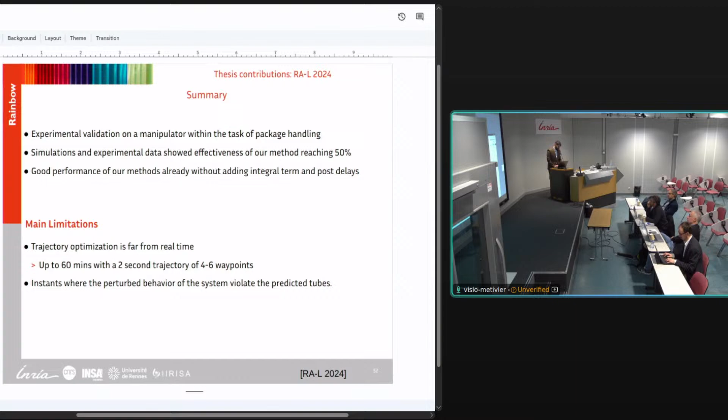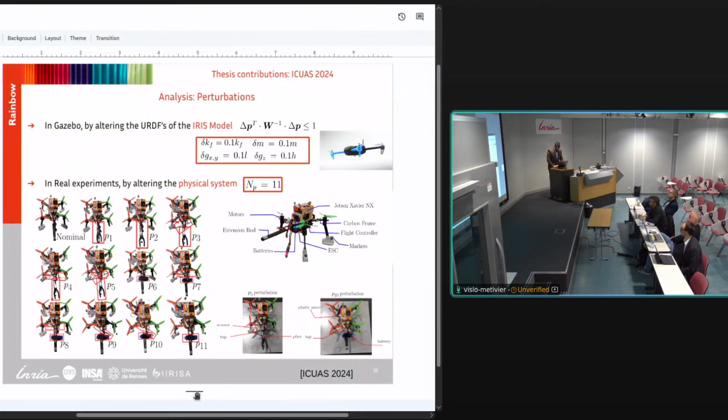For example, let's say, can you show, for example, on 32, like here, maybe? Yeah, exactly. So, of course, for the drone, you have this kind of markers that we actually take from the Vicon system. The experiments were done in this room in particular. We have this Vicon system that actually gives the position of the drone, but then what you have inside the drone, I don't know if I can zoom or something, we have IMU, we have all these kind of sensors that we depend on, also with some extended Kalman filter, EKF2, so to actually measure the states.

But inside the framework, let's say in the framework sensitivity, we didn't really deal with the sensors, and we didn't deal with having noisy measurements and so on. We always assumed that the measurement that we are getting is the right measurement, and we have no, let's say, uncertainty in it. But yeah, you're not using them. We are using the IMU, and we are using the position. I mean, we are using the angles.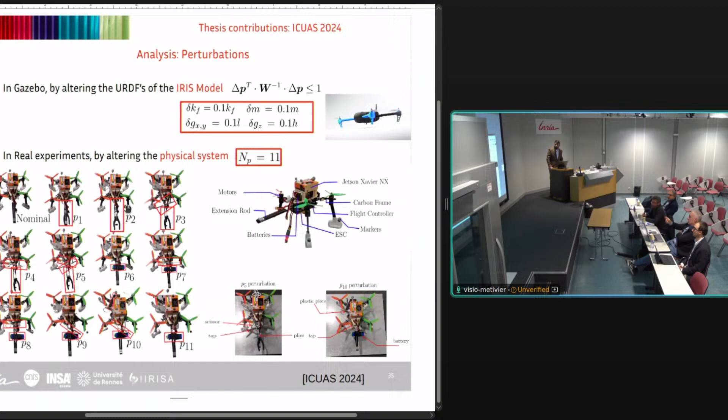Yeah, maybe the 132. No, this one. Yes, maybe not this one. You mean? Yeah, this is it. Yeah, but you need the angles of the quaternion, for example. You need the quads. So you have a quaternion set point, and you basically need the rotation and so on. So it's all of course. Okay. So you're not using exteroceptive sensing, or are you? You're just using proprioception, no? Can you define exteroceptive? I forgot. I mean, you're not.

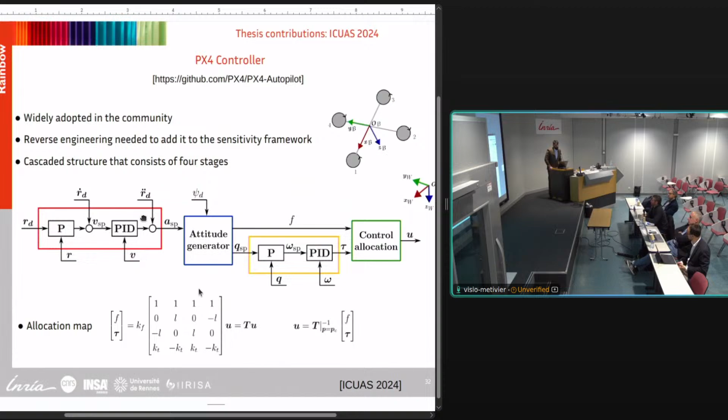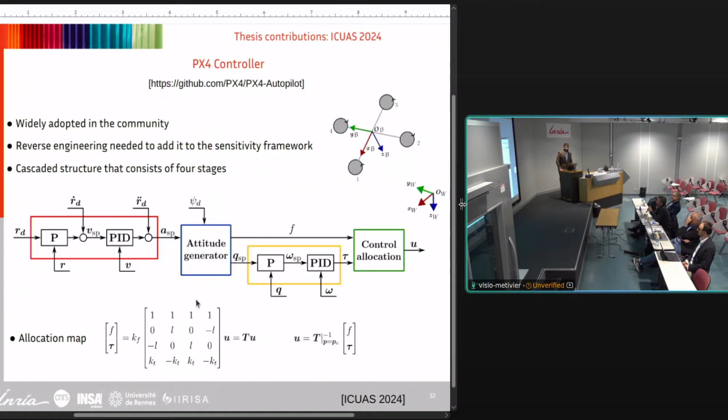Can you trust those sensors to track your trajectory? They're directly giving you the trajectory you want to follow. Like, for example, the IMU, or the sensors you mentioned before. You have sensor fusion with multiple IMUs, so you can select. With the PX4 controller, you have maybe 4 IMUs that give a good estimation of the quaternion, or a good estimation of the states of the system, if this is what you mean.

I would tend to say that if your goal was to track a trajectory, a Cartesian trajectory for example, with parameter uncertainty, if you have reliable exteroceptive sensing, you can do it just with the sensing, without the model. Even if your model is uncertain, you don't need all this. This is what I mean.

I think one of your underlying hypotheses is that you could use a camera, LiDAR, GPS, or the mocap. Of course, the mocap is a bit of cheating because when you deploy your drones, there's no mocap. But I think these sensors you mentioned are more proprioceptive — they tell you the state of the system, which is useful, but it's liable to error. That's where the parameter uncertainty is tricky, like odometry. But if you had exteroceptive sensing, you'd be relieved from parametric uncertainty. Maybe I'm wrong, so please prove me wrong.

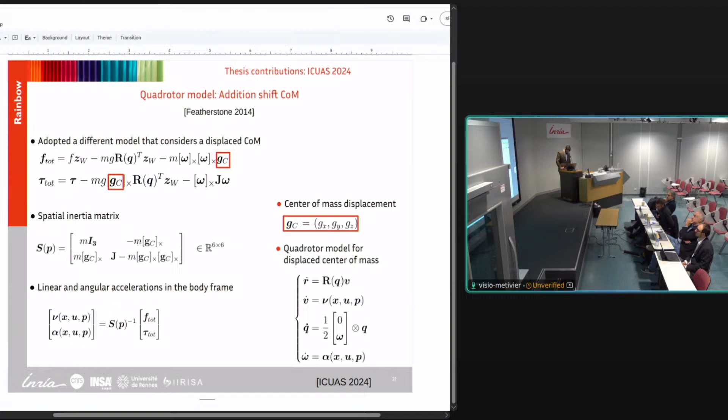Yes, of course. The end effector, so the variations of the end effector in position and velocity, you want to calculate the variations of this with respect to the parameters. To do this, you have the variations of this with respect to the states Q and Q dot, multiplied by the variations of the states with respect to the parameters. The variation of the state with respect to the parameters is something we know, the state sensitivity matrix. We put it aside. That is a Jacobian, which is Jacobian capital X, equal to the partial derivative of capital X, the position and velocity of the end effector, with respect to the joint angles and velocities.

Okay, so you map the sensitivity with regards to joint towards sensitivity with regards to Cartesian operational space. Yeah, exactly. And this was also done on the drones, of course, but it was not called J, because on the drones you also have from thrusters to pose. No, but in the drones, when you were calculating the pi, you could have del f over del q directly, so it was already in the right state space.

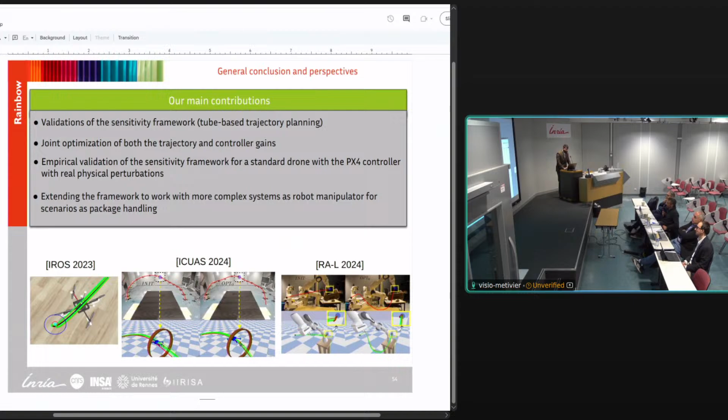Yes, can you explain? So basically, in the tubes of the inputs, here we are estimating the maximum deviation of the inputs that we can suffer along, for example, T4, with the input tubes being in red and the perturbed being in green. So we actually try to deviate, let's say, the box package inside this parameter ellipsoid.

But however, there are some cases where this actually had a violation. I don't know if you can see it, there is some sort of violation of the tube. This violation happened, and we have to acknowledge it. We think it's because maybe of the first order sensitivity analysis or the exclusion of additional forces that can affect the robot, like friction. So that's why we added this. But however, in the state, I don't know if I managed.

So I just want to show you another result. For the state, here we projected the tubes on the end effector position X with the INIT and the OPT_a for trajectory 1. The tubes seemed really good, for example, for the X position.

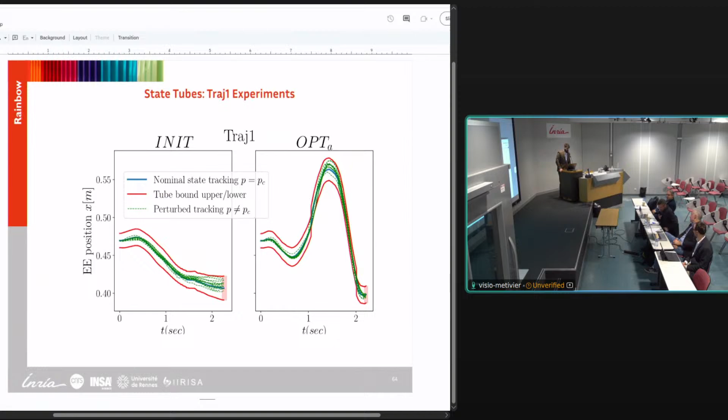Okay, so do you hear me? Yes, yes, yes. So thank you very much. First of all, I would like to thank Paolo for inviting me in the jury, and I would like to apologize for not attending the defense physically today due to timetable constraints. I would prefer to be with you, but sorry for that.

I also would like to join my colleagues and congratulate you for the presentation, which follows quite faithfully the manuscript, with additional simulation and also videos. So you had a lot of questions, so I had similar questions to Andrea and Fabio, but I will try to have new ones.

So first of all, I would like to come back to the implementation, when you implement the optimization process. Andrea was already asking you how you did the implementation. I have the comment that you didn't describe in your manuscript how you developed your symbolic library with all the calculations, and that could be useful to explain, because I couldn't understand why, for example, in slide 29, you said that it took 25 minutes to compute the trajectory.

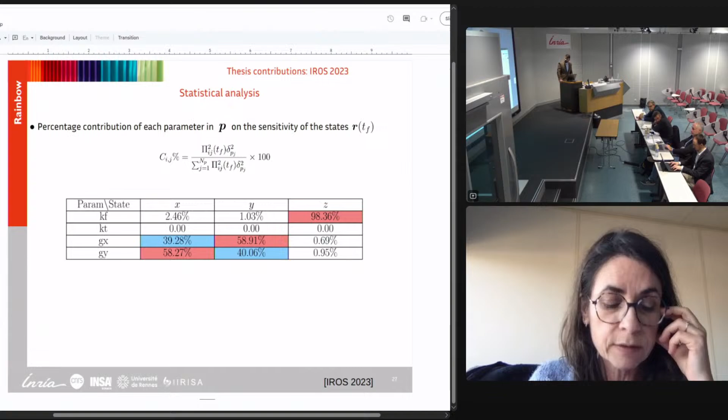I appreciate a lot that you did some comparison using different controllers - geometric controllers, near hovering controller, and sliding mode control. You didn't have time maybe to come back to that during your presentation, but it's written in the manuscript. I was wondering, the differences were not very big between all these controllers, so what is your conclusion?

Can we use different controllers with such robust trajectory planning, or do we have to also use a more robust controller like SMC? What is your conclusion about that? I would say that it depends on the controller to be tracking quite well.

It depends on the tuning of the controller - it's a very essential element for any controller to track, so the tuning for the controllers matters. Basically, even a near hovering controller or PID can be tuned in a certain way to be more robust than other controllers, if you want, but it's all about the tuning gains. So what we did in this was to give a fair comparison between the controllers and to really see how each controller would behave, and to be able to compare them across the cases.

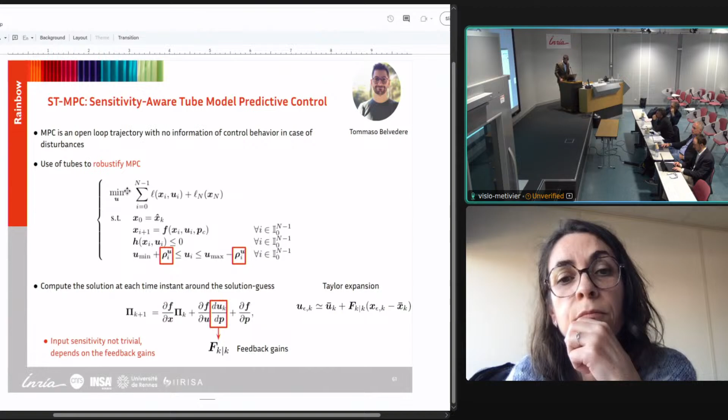So then what Tommaso did is he estimated, using QP as the MPC to be a QP, and he had this solution which is W star, the X star and U star, and then he did this Jacobian of differentiating the solution with respect to the current state. From these matrices, you can relate how future states depend on the current state, and how future inputs depend on the current state also. But this is not what we wanted, actually.

We want to know how the future input is varying as you vary the future states. So with a lot of math involved, he actually applied for a TRO paper, and we managed to get these feedback gains, which allowed us to compute the input sensitivity and put it inside the MPC formulation. I think he used the multiple-shooting transcription for the MPC and the SQP around the current solution. So if this answers your question, yes, it was done somehow with MPC, with Tommaso, a PhD student at the time, but now a postdoc here.

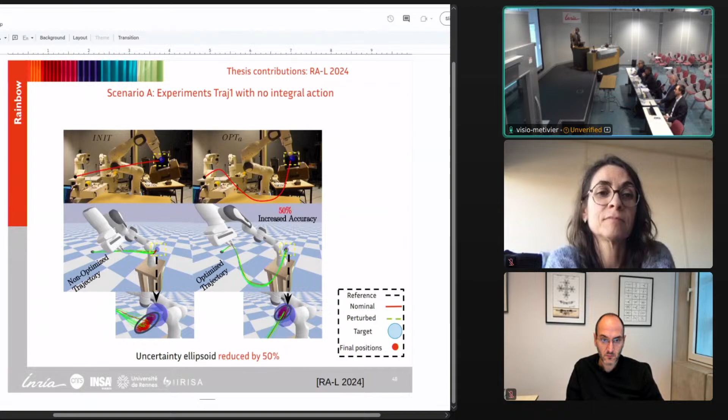I just want to add one thing. If you can go to the slide with perturbations on the drone, which I think is where Fabio had a question, and also had a question if I remember well on this point in the report. As Marco said, the main point is that we never need to know the value of the parameters in the perturbed case. We only need to know the value of the parameters in the nominal case, which is when nothing is attached to the drone. This is the only thing we need to know, along with the range of variation. When we attach something, that's it - we don't need to do anything, because we have the assumption that the parameters will change and will stay inside the range we imagine. So we never need to do an identification when we attach something or perturb the parameters. PC is only for the nominal case.

And for the manipulator, PC will be the value of the parameters in the case where, in the box, there is a nominal mass point. Then we add stuff and we don't have to do anything at all. This is one point that maybe didn't come across well, but we think it is a good point of the method because it doesn't require re-identification.

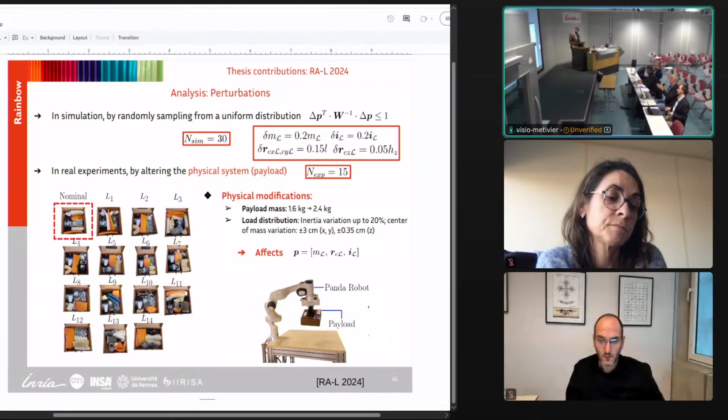Then for the control, I think there is a little bit of misunderstanding, because of course there is control - nothing is open loop. The quadrotor is controlled, the manipulator is controlled. One point is that all these computations are done by taking into account what specific control will be used on the drone or quadrotor. If the control is changed, the optimized trajectory will be different, because it will be optimized for another kind of controller. So every controller will have its own optimized trajectory.

So here there is an exteroceptive sensor, of course, which is Vicon, because otherwise you cannot fly. There is feedback on the position, the error with R. R comes from Vicon, and V also comes from Vicon because it's the derivative of R, and the rest comes from the IMU. So for the question of why - if you have vision and use onboard vision to control, say you want to pass through a window or whatever - then you wouldn't need this because it would be robust.

I don't agree. Why? Because it's the same as in Vicon - also in this case we have Vicon. Vicon is very precise, but when we have uncertainties in the parameters and actuation constraints, if you start changing the parameters with respect to nominal value, you will have deviations in the trajectory, even with feedback from Vicon, because you're imagining your mass is 1 kilo, but your mass is actually 2 kilos. So you have feedback, but the feedback will mitigate but not exactly correct it. You will have a deviation, and if the deviation is too large, you may incur saturations. While when we do this planning, we guarantee in advance that if the variation is inside the range, we will never saturate, in the first order analysis.